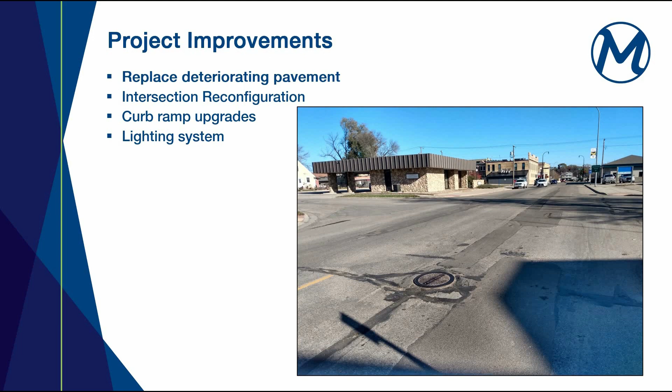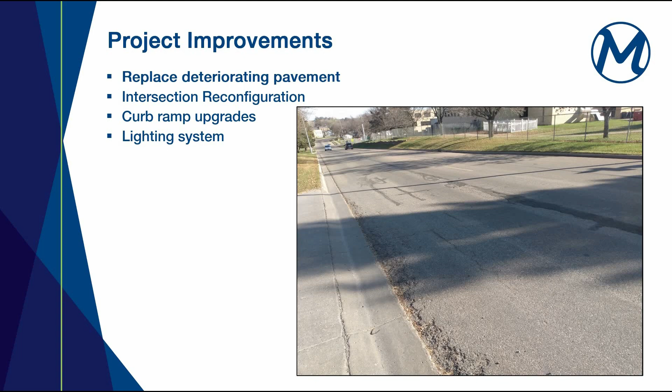The intent is to leave the curb and gutter in place. Any drainage issues will be corrected, including a portion of the valley gutter on Prospect Street near Lisbon High School. It currently holds water and creates icy conditions near the stop sign during the winter. The project will also replace striping, including crosswalk markings.

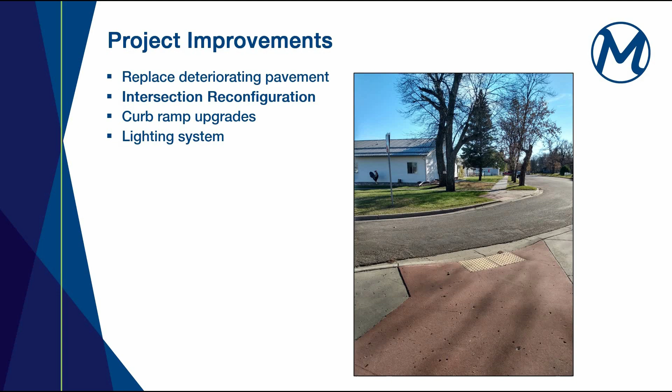The intersection of Highway 27 and Forest Street is intended to be reconfigured due to the misaligned curb ramps on the south side of the intersection, along with the missing east-west crossing. The right turn slip lane island is planned to be removed to eliminate a pedestrian vehicle conflict point. This will also make maintenance such as snow removal more manageable.

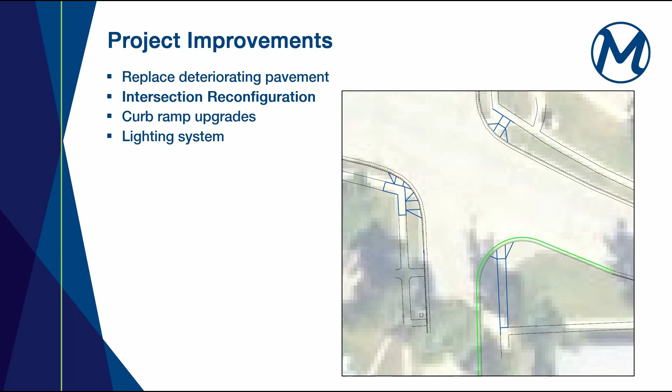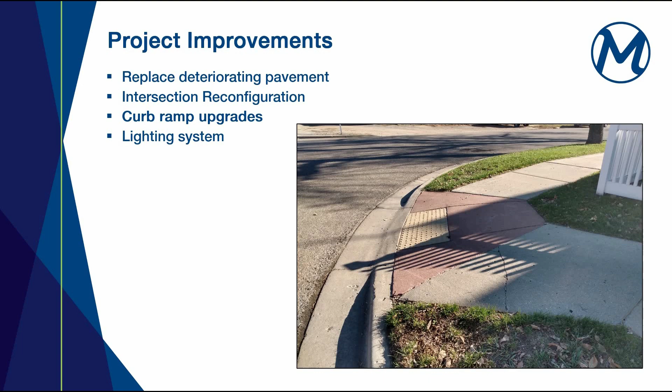The sidewalks from the south will be extended north to provide an improved crossing situation, along with a slight reconfiguration of the other ramps. Curb ramps are to be evaluated for ADA compliance and upgraded if found to be out of compliance. Initial observations indicate most ramps are missing the required landing on the top of the ramp. This shows a rendering of proposed ramp reconfigurations along with restored crosswalk markings.

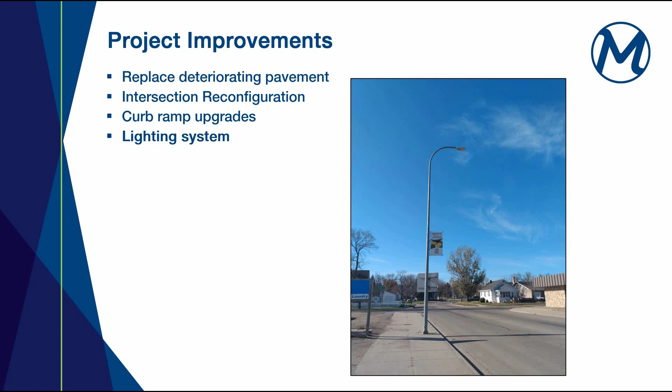Lastly, the lighting system is proposed to be upgraded from inefficient, high-pressure sodium lights to LED lights and replace the standard poles to match ornamental style like the rest of the highway through Lisbon. This improvement will reduce operating and maintenance cost of the system. This upgrade will complete the systems on both Highway 27 and 32, including a single light outside of the pavement replacement area on the west side of Highway 32 near the Sheyenne River Bridge.

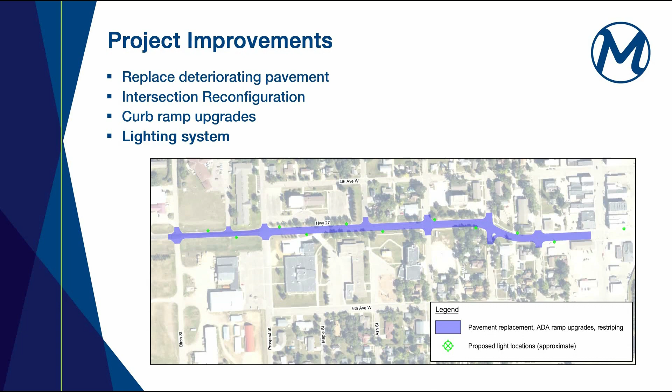To follow the National Environmental Policy Act of 1969 and ensure all environmental clearances are explored and cleared, an environmental document is to be created. Some of these tasks have been completed and some still remain.

These components include a survey of historical findings of cultural significance. A Class 1 literature review concluded with no historical properties affected. Threatened and endangered species review involves checking the presence of any identified critical species affected by the work activities or proximity to protected habitats. No species are anticipated to be encountered.

A wetland delineation was performed within the project limits. No wetlands were identified in the field survey.

Right-of-way needs will be identified further into the design process. Simple curb ramp and sidewalk agreements are anticipated for any curb ramps that are to be replaced. These temporary agreements are with the adjacent landowner to replace the curb ramp near their property with a similar ramp layout but updated to current ADA standards. No permanent fixtures will be constructed on private property, and the areas disturbed will be returned to their original condition.

Section 4F lands carry certain avoidance or mitigation efforts to minimize impacts. Section 4F properties include publicly owned parks, recreational areas, or wildlife and waterfowl refuges, or any publicly or privately owned historical sites listed or eligible for listing on the National Register of Historic Places. No Section 4F areas were identified within the project limits.

As there are no wetlands with the project, a U.S. Army Corps of Engineers Section 404 permit is not required. With any construction project that disturbs more than 1 acre, a North Dakota Department of Environmental Quality stormwater permit would be required by the contractor before construction begins.